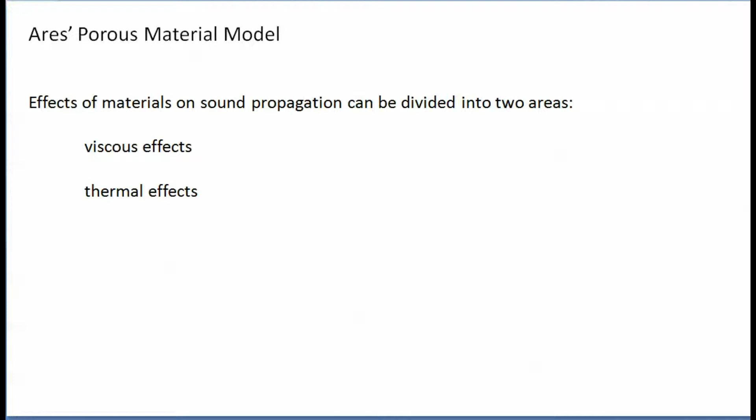In fluid mechanics, there's a condition called no slip at a fluid wall boundary. So the assumption is that the fluid is not moving at the walls. Since we do have fluid motion inside of the tube, there will be a velocity gradient from the maximum velocity in the center of the tube to zero velocity at the wall.

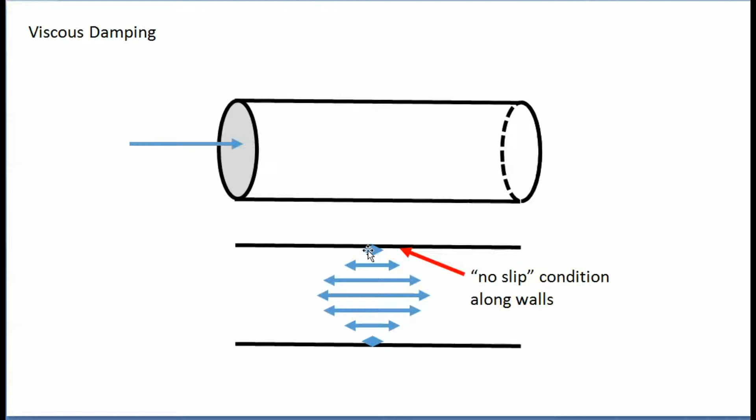This velocity gradient causes a shearing of the fluid. Since air is essentially a compressible fluid, the viscosity of the air causes an energy loss mechanism or a damping mechanism as the sound travels through the small tube. This energy loss mechanism leads to sound attenuation or the resistance to airflow through the small pores.

The smaller the tube, the more shearing you have, and so the more resistance or viscous losses you have as the sound travels through the tube. This viscous shearing of the fluid as it travels through the pore is the main cause for resistance when you try to blow air through a cloth, such as your shirt.

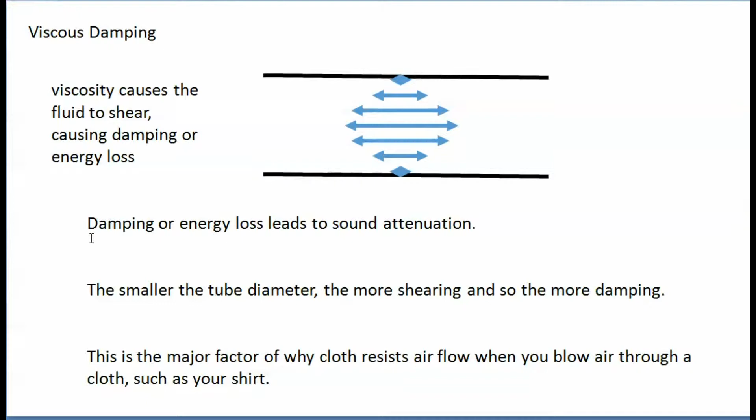This resistance to flow caused by the viscous shearing is one of the main energy loss mechanisms of sound traveling through porous materials. The next major effect is from thermal conduction of energy from the air into the walls or the porous material structure. When you compress air, that air will heat up. If that process is slow enough, there will be time for the heat from the air to conduct into the frame of the porous material.

On this slide, I'm showing a volume on the left here with a plunger ready to compress the air in the volume. If at time equals 0, you suddenly push the plunger in a significant distance, the air inside of that volume will heat up. If the plunger is held in place for a relatively long period of time, the excess heat generated from compressing the fluid will have time to conduct out into the walls of the volume. As that heat energy conducts out, the pressure in that volume will slowly drop.

This effect is roughly sketched here, where at time equals 0, the plunger is thrust in, and the pressure climbs to some value we'll call P1. As time progresses, the heat conducts into the walls of the volume, and the pressure will drop to a steady state value of P2. In the world of thermodynamics, P1 is referred to as the adiabatic pressure, whereas after the temperature has been allowed to equalize, P2 will be an isothermal pressure.

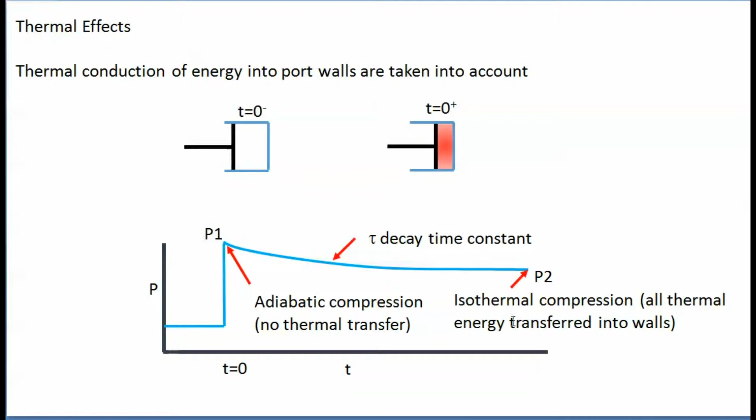Note that P2 is less than P1, so it's easier to compress gas isothermally than it is to compress it adiabatically. With an adiabatic compression, there's no time for any thermal transfer between the air and its surrounding environment. With an isothermal compression, the process is slow enough so that the air temperature remains constant.

There are some important numbers to glean from this graph. First of all, P1 divided by P2 has a very specific value. It's called the ratio of specific heats. It's given the variable name gamma, and it's approximately equal to 1.4 for all simple gases. This means that if you compress the air slowly, it's 40% easier to compress the air isothermally than it is adiabatically.

If you look at this graph, there's a time constant here, I'll refer to as tau. You can imagine that there's a slow decay from P1 to P2. 1 over tau will be a frequency, which we'll refer to as the thermal transition frequency.

For a 1 millimeter diameter tube, the thermal transition frequency is about 150 hertz, so it's fairly low. But if that tube is decreased to just a quarter of a millimeter in diameter, the thermal transition frequency goes up very quickly to a value around 2.3 kilohertz.

What you see here is a graph showing frequency on the X scale, and the Y scale shows the effective bulk modulus of the fluid. This is how hard it is to compress the fluid, how stiff that fluid is. At low frequencies, where we can expect the compressibility to be isothermal, the bulk modulus is the ambient pressure of the gas, or P naught. For us, this would be the atmospheric pressure, or 1 atmosphere, which is roughly equal to 0.1 megapascals.

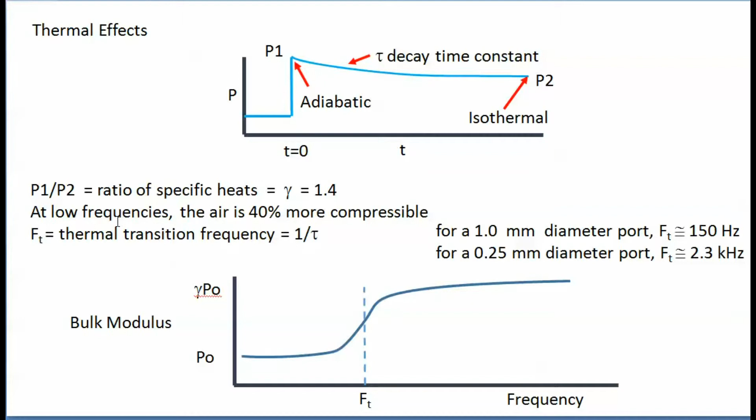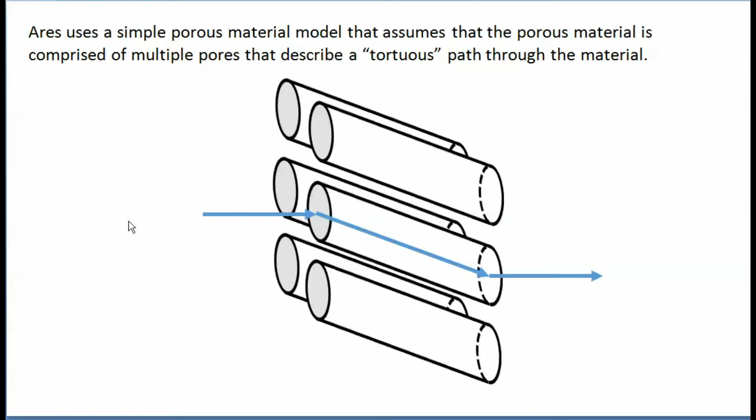ARES uses a simple porous material model that assumes that the porous material is comprised of a number of parallel tubes which may be bent at an angle, and so the air doesn't go straight through the tubes but follows a tortuous path. The three parameters that ARES uses in its model are the pore diameter, the porosity, and the tortuosity. The pore diameter is a somewhat fictitious diameter size of the individual pores in the porous material. Some materials have well-defined pores that you can identify. Others don't have anything that looks like a pore at all, but this model still effectively captures the behavior.

Porosity is the fraction of the volume occupied by the air. So if the porosity is 0.9, that means there's 90% air and 10% solid material. Most of the materials we work with in acoustics have a very high porosity of 98 or 99%. It doesn't take much material to have a significant effect on the acoustic behavior.

Tortuosity is a measure of how tortuous the path is as the sound travels through the material. A value of 1 roughly means that the air flows directly through the material. A value of 1.2 would mean that the air path is roughly 20% longer than the length that you'd measure if you just simply measured the distance through the porous material. The tortuosity mainly affects the viscous damping. So by setting the tortuosity value of 1.2, you're increasing the viscous damping by roughly 20%.

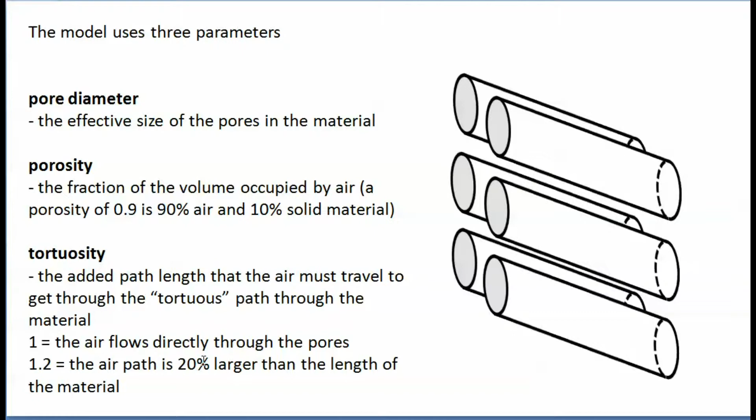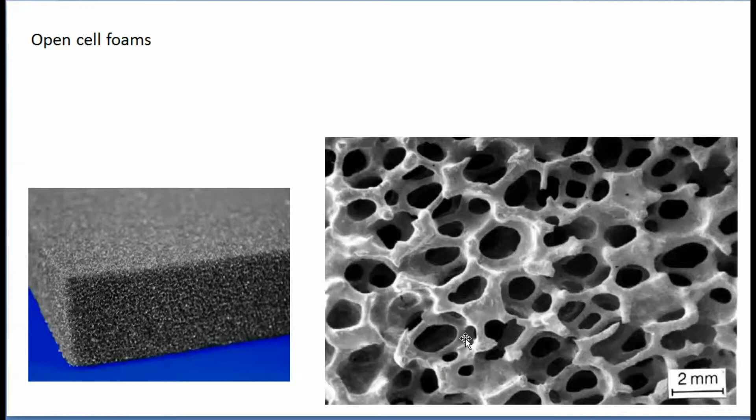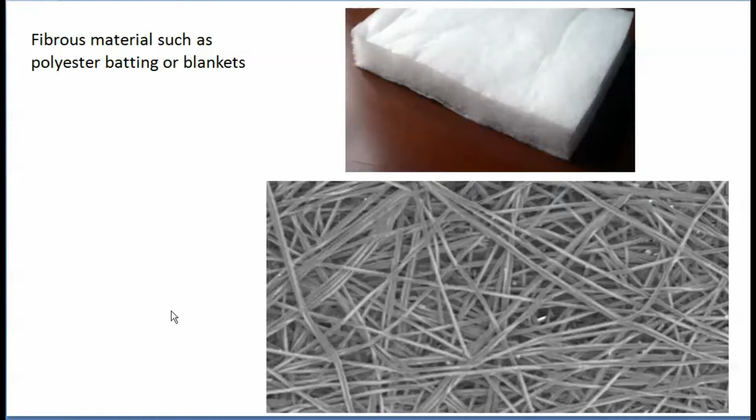There are some important limitations of the porous material model that ARES is using. One of them is that the porous material doesn't move. This is also referred to as a rigid frame assumption. So as the sound travels through the material's pores, the material itself is massive enough or rigid enough not to move. This assumption is surprisingly true for most conditions. However, there will be some materials which will move at some kind of resonant frequency. This resonant frequency usually extends over only a short frequency range, and so even if we do get some material motion, it's usually not very significant for the overall acoustic behavior of the material.

So leaving out the material motion allows us to dramatically simplify the model without losing much detail. Another assumption is that the pores are open or they're interconnected, so that when the air flows into the material, it's able to flow into all the pores, all the pockets, and when it flows out, all of those pores and pockets are evacuated. This model isn't appropriate for closed cell foams or for a material that might have an impervious skin over top of it. But it's usually undesirable to use these type of materials in acoustics anyway, so this shouldn't be a major limitation.

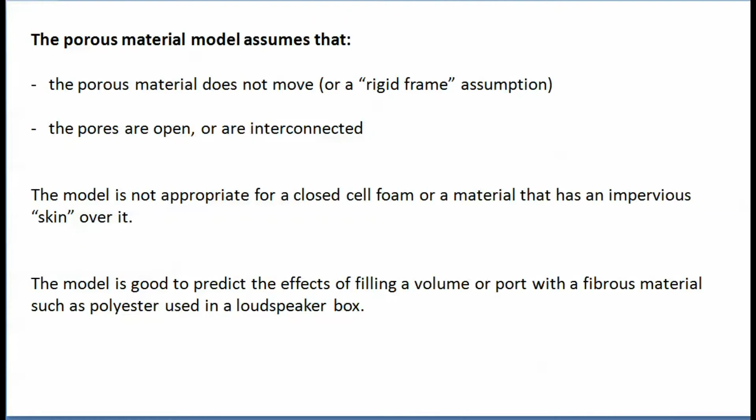One of the best uses for the porous material model is in predicting the effects of filling a volume or a port with a fibrous material such as polyester, which is typically used in a loudspeaker box. So that's a quick introduction to some of the theory behind the porous material model. I'm now going to open up Ares and build a quick little model to show you how you might be able to use this. So I've brought Ares up.

I'm going to create a modeler module, and now I'm going to start building the model. I'm not going to put the elements on the top level model, however, because where you specify the porous material behavior is in global parameters. Under global parameters, you find the fluid properties that will be used for all the elements. There's an option to use a porous material model. If I click this, the porous material parameters become available, and all of the elements that use the fluid will now use these porous material properties.

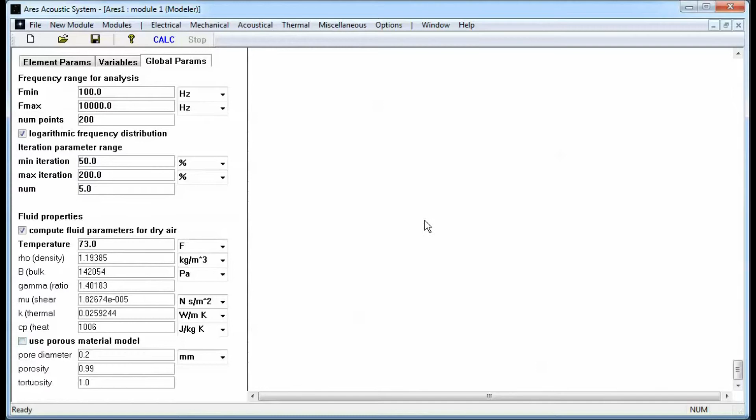Note that you'll usually only want to apply porous material to a few elements in your model. By selecting it here, all of the elements in our model will have the porous material applied to it, which is typically not what you want. So I'm going to turn this off, and instead we're going to create a subcircuit. So go to Miscellaneous, create a subcircuit, and now I'm going to click inside of this subcircuit, and we can create a new model inside of here.

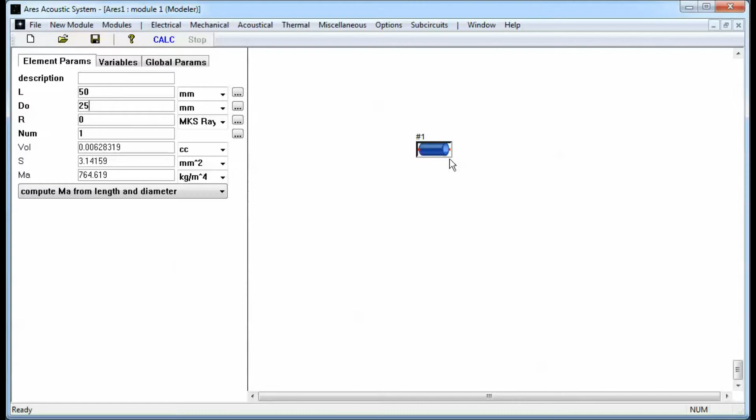I'm going to go to the acoustical menu, select circular port. I'm going to set its size to be 50 millimeters long and have a diameter of 25 millimeters. These sizes are going to be important in another video, so I'm just going to select those for now. So I'm going to want to drive this tube at one end and leave the other end unconnected. When I leave the other end of this port unconnected, that means there's going to be an infinite impedance here, or velocity 0, at the node to the right. This effectively turns this port into a volume. But since a port takes the standing waves into account, we will see the effects of the standing waves inside of this volume.

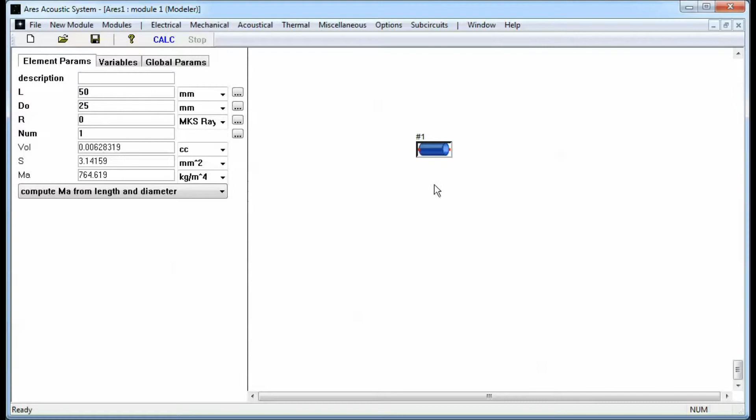To bring this node out, I need to create a node element, and I'm going to connect it up to the left side of the port. I'm going to click on the node element, and I'm going to give it the name of port volume to let us know that it's connected to the volume.

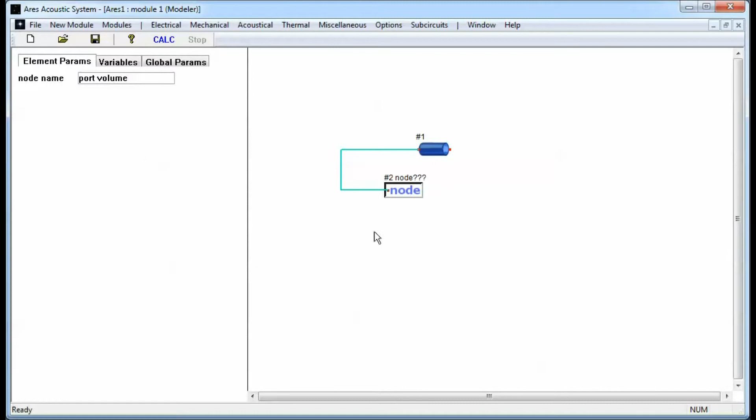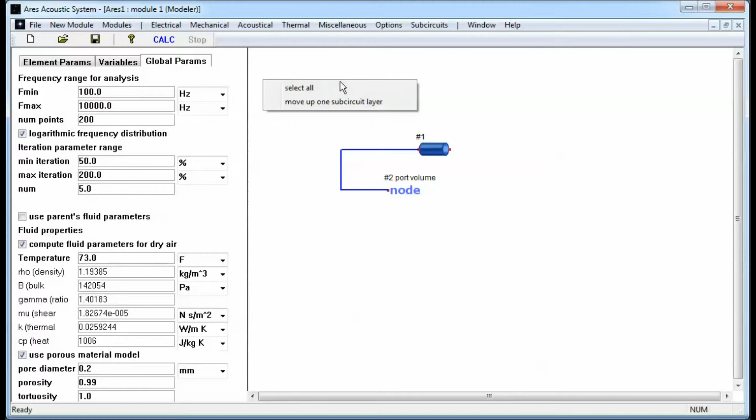Now in this subcircuit, I can specify the fluid parameters just for this subcircuit. When you create a subcircuit, by default, it inherits the parent's fluid parameters. So the circuit that this subcircuit belongs to will be used for all the fluid parameters unless I turn this off. So by unchecking this, I can now specify the fluid parameters for this entire subcircuit. Now I'm going to turn the porous material model on, and so the porous material model will only be applied to this element, number 1 here. I'm going to stick with the default porous material parameters, which will be discussed in another video. To go back up to the main circuit, I'm going to right-click and select Move Up One Subcircuit Layer.

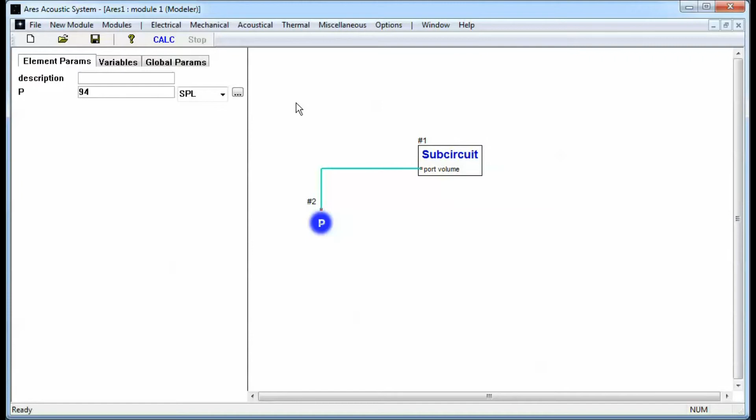And the subcircuit element now has port volume as the name of its node. I'm going to need to drive this, so I'm going to create a pressure element to drive it with. I'm also going to want to compare the impedance into that porous filled port with an identical port that's just filled with air. So I'm going to go ahead and create another port element in this upper circuit. I'm going to give it the same length, same diameter. I'm going to drive it as well.

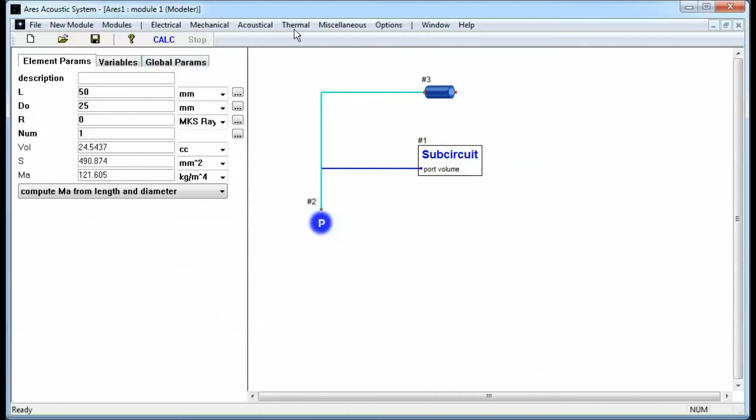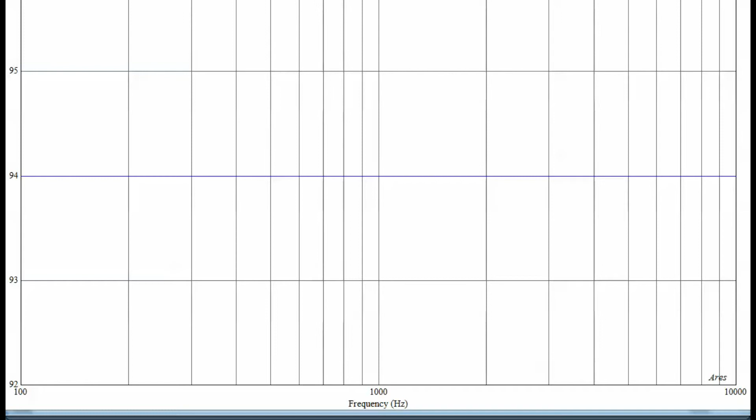I'm going to solve for this. Actually, I'm going to go and increase the number of frequency points to 2000 so we have lots of resolution. I'm going to solve for it, so that solves pretty quickly. I'm going to create a graph element, and I'm going to first plot the impedance of this port. When I created the graph element, this graph window was created. Now right now it's showing 94 dB. That's because we're plotting pressure.

So I want to select impedance instead, and I'm going to set the line weights to 3 so it's nice and heavy and we can see the impedance. So I'm going to go back to the graph element. And this is the impedance, and this is magnitude dB in acoustic ohms of the impedance. And this is the impedance seen looking into that air-filled port. It's 50 millimeters long. At low frequencies, the impedance is fairly high because it's behaving like a sealed volume.

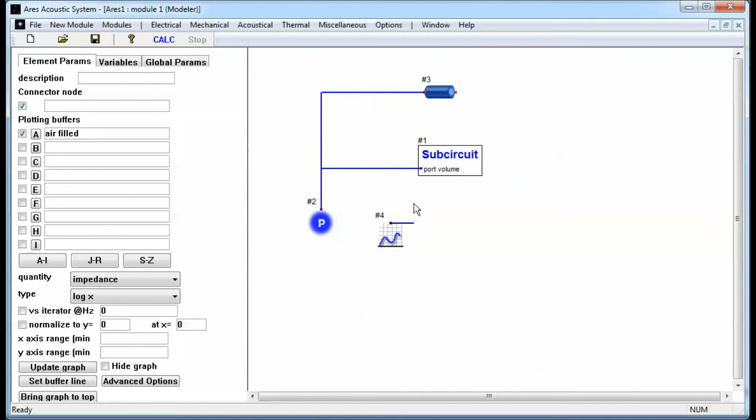At the odd number of quarter wavelengths inside the tube, we have impedance minimas. At even number of quarter wavelengths, we have impedance maximas. So this is a largely undamped tube just filled with air. I'm going to copy that into buffer A. I'm going to call it air filled. Press the A button to copy it. Hit that check mark so it'll be plotted. And now I'm going to move down to the subcircuit node and plot its impedance.

So let me go back to that graph. So now the air-filled data has been copied into the A buffer, which is plotted in green here. And the impedance with the porous filled tube is shown in the blue curve. As we can tell immediately, the effects of the quarter wavelength and half wavelength resonances have been pretty much eliminated. There's a little bit of a wiggle here, but the porous material has dampened the resonance so much we barely see them.

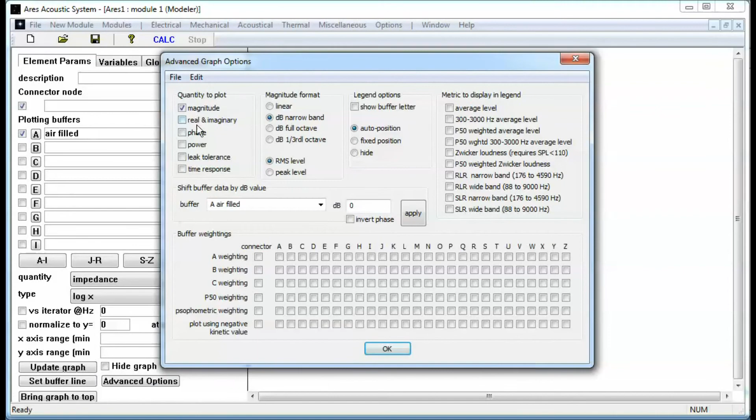Another major effect, which is perhaps even more important for us, is that the impedance at low frequencies has dropped. This is the effect of the thermal conduction going from an adiabatic compressibility with the green curve to an isothermal compressibility at low frequencies due to the porous material. To take a little closer look at this, I'm going to go to the advanced graph options and plot the real and imaginary part of the impedance. I'm going to go back to the graph.

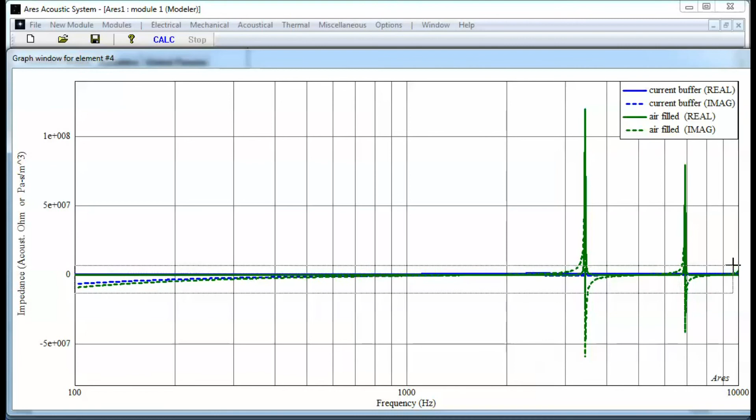So on the real and imaginary part, these resonances are dominating what's going on. I'm going to want to zoom in on this graph so that I can see the real and imaginary terms with the porous filled material as well. So the blue impedance is that filled with porous material. The imaginary part of the impedance at low frequencies has decreased. This is our 40% reduction in the impedance. Another way of looking at this is that the volume is behaving 40% larger due to the presence of the porous material.

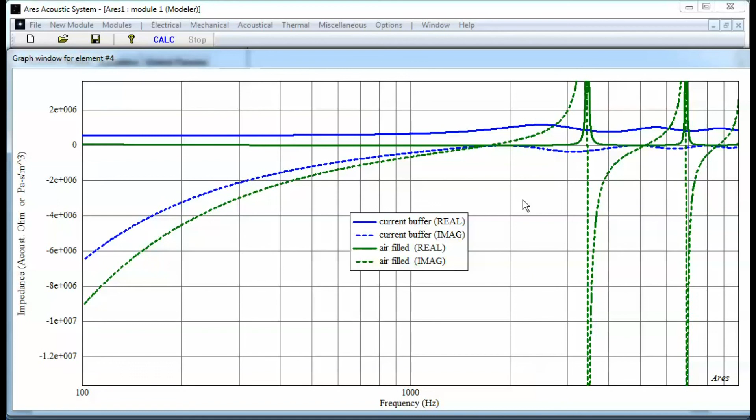Also, the real part of impedance seen looking into that tube goes from virtually 0 to a finite value for the real part. And it continues to behave fairly well through the standing wave resonances of the tube. So this is the major effects of the porous material model that I wanted to show you. ARES is able to predict thermal effects, which are especially important at low frequencies. It's able to capture the viscous effects, which is largely responsible for the real part of the impedance. And it shows that these resonances virtually disappear when the volume is filled with the porous materials.

So that's the majority of what I wanted to show you. ARES is able to model the most important effects of putting porous material in your design. I'm going to have another video showing how to obtain some of these parameters using the SEMA impedance measurement apparatus.